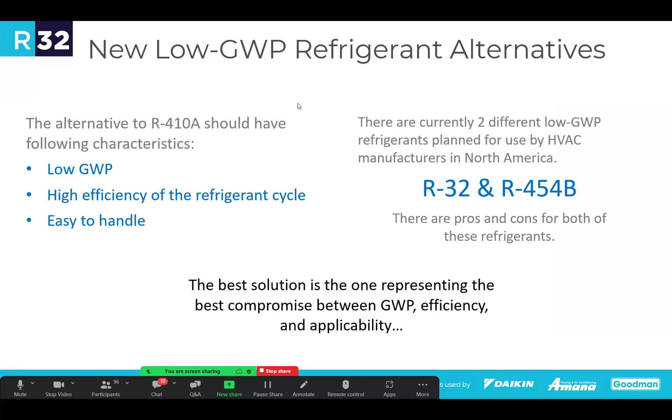So when we boiled it all down, we came down to R32 and R454B as really the two choices, and both have their own pros and cons that we take a look at. And my goal for today is kind of to walk through those pros and cons and to try to lay out the facts for you.

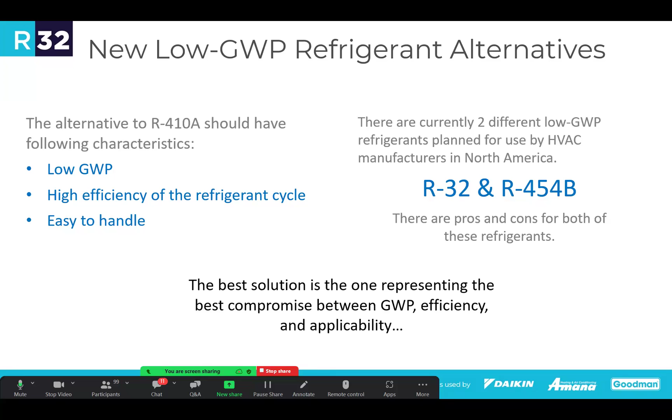And really, when we look at Daikin, Daikin has decided early on that we believe R32 is the best way to go. And I'll share some of our thinking behind that, but I'll leave it up to you at the end of this to decide where you think is the best option as you're going out and serving your customers and you're trying to make sure that you do the best to take care of everybody that you're working for. So that's where we're going with this whole entire presentation as we move forward.

So why R32? It's the first resource that I'll give you. And when we get to the end of the presentation, you don't have to write anything down. I'll give you a couple of QR codes so that you can go and access all of this information. But we created a website back in 2019 called r32reasons.com.

And we came up with really, when we look at it, that R32 is proven. There's over 230 million units, so we'll talk about that a little bit today. It's very easy, so it's very easy to top off. We'll talk about that a little bit in the field and why that's going to be important for your technicians. It's very efficient. We'll talk about the efficiency and the benefits that you have in your equipment.

And then the fact that it's available, it's a commodity. And so with a commodity, you're going to be able to take all of those pressures that you have out there and enjoy some really good cost savings potentially because it is a commodity and it's not a proprietary blend. So with all of that being said, let's go ahead and get in and start talking about this.

So the very first thing, let's look at Canadian regulations. So Canada ratified the Kigali Amendment, and that actually happened after the Paris Accords. So you had the Paris Accords that happened, much like the Montreal Protocol. And to sum up, all of the countries that signed on to the Paris Accords agreed that we don't want to raise the temperature of the planet more than 2 degrees Celsius. And so all of these countries said, we commit to not raising the temperature of the planet by more than 2 degrees Celsius.

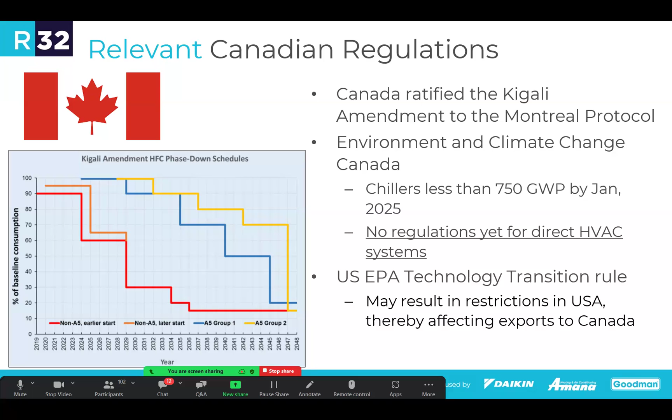However, some other countries have done that in other parts of the world and are looking at other different types of ways that they can utilize refrigerants. But we'll talk about that in the efficiencies when we get to that too. So what's happening in North America? North American HVAC manufacturers are planning to use either R454B or R32 refrigerants. As I said before, good news is R32 is already a staple in many other countries.

And like I said, there's over 230 million systems that have been installed worldwide, and that's in over 130 different countries. The interesting fact I like to share in terms of safety is, to my knowledge, there's not a single instance of property damage or injuries due to R32 being installed in a home and due to the fact that it's an A2L. So we do know that it is a safe refrigerant.

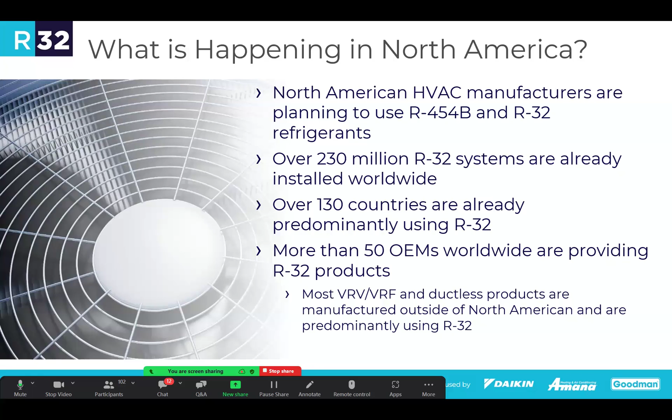And there's over 50 different equipment manufacturers worldwide that are providing R32 products. Most VRV and VRF and ductless products manufactured outside of North America are predominantly using R32. And so this just gives you a little bit of background when we're looking at the different refrigerants and what's available. So this is what's happening globally. You take a look at all of the rest of the world, the only area is North America that is considering R32 and R454B.

And so when you just look at the simple worldwide economics of scale, we know that there's a lot more R32 that is available. And R454B, one of its components being 1234yf, is a proprietary component. And so when you have a proprietary chemical, that can change availability, because you have limited production, and you also have challenges that will come into play as far as pricing and cost when you have that limited availability. And so that was one of the concerns that we looked at.

The good news is R32 has been used for a long, long time. So it started out in Japan in 2012. In fact, Daikin was the first manufacturer to utilize R32. Daikin did not create R32, but we were the first to utilize R32 for air conditioning. And we actually developed technology that optimized some of the characteristics of R32.

What we did when we started to look at where we're going to go with a low GWP refrigerant, is we actually released all of the patents that helped to take advantage of optimizing that and made that available for the whole entire world. And so we released our patents out and said, we really do believe this is the right way to go. And made sure that that technology was available to everybody else to be able to enjoy all of the benefits that R32 has for us.

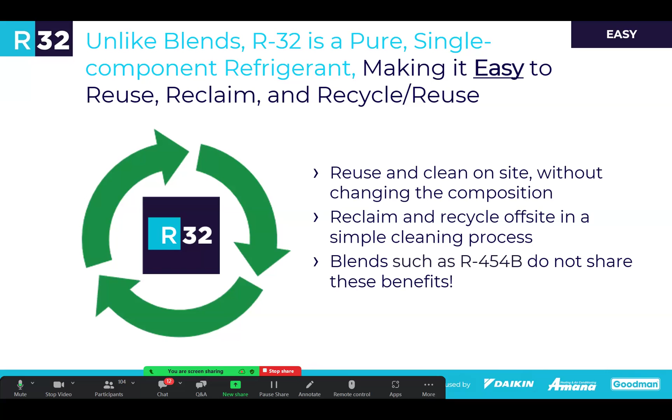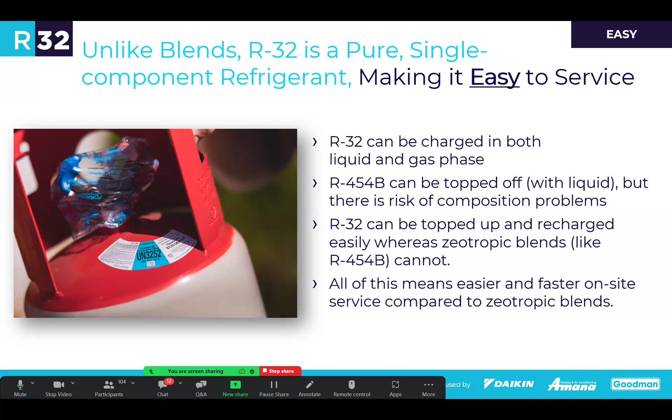And so it does make it a lot simpler, a lot easier to work with a single component refrigerant that, again, goes back to helping with the training of the people that you're working with and making sure that everybody is comfortable using the refrigerant as we move forward. Unlike blends, R32 is a single component. Also, this is going to make it easy to service because, again, we're not going to worry about it changing what it is because it's leaking at different rates. And so that's the first kind of thing that we look at.

When we look at the breakdown, it's also interesting to note 70% of R454B is R32. And so when you look at the breakdown of this, R32, 1234yf, 31% of it is that proprietary blend that is owned by Chemours and Honeywell. And to my knowledge, we're just starting to see that product come out and make its way into the marketplace.

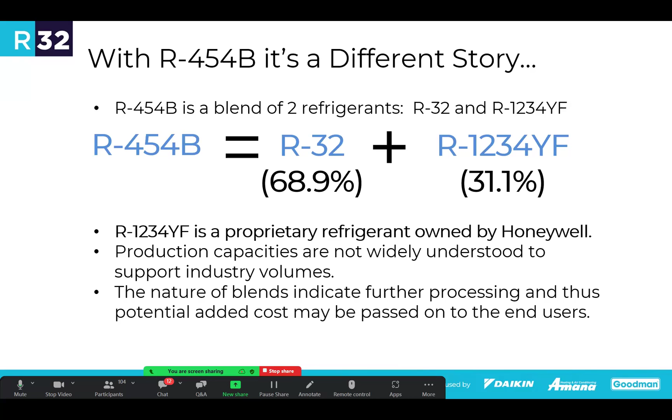But this year will be the first time that you'll start to see 454B systems out in the marketplace. And so it'll take a while to see how those systems are going to perform and what's going to happen as they get out into the real world and out of the laboratory testing situations that they've been doing for a while.

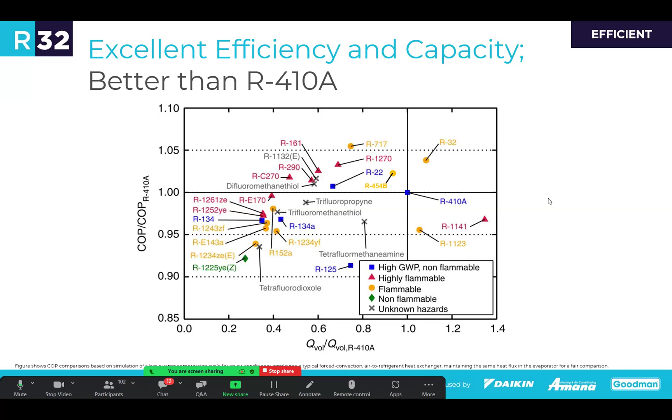By the way, here would be your R290, which is your propane. Again, not falling into this quadrant, which is going to give you all of the desired things that we were looking for. So we did an experiment, and I will never recommend that you take a 410A system and you put a different refrigerant in it. Same thing if you have a 454B system, that needs to remain 454B. If you have an R32 system, that needs to remain R32. You don't change refrigerants.

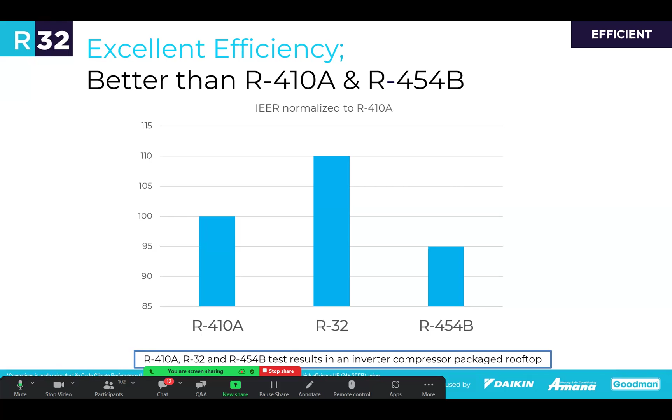But in a laboratory test environment, we were able to take a 410A system. We took all of the 410A refrigerant out, and then we added R32, and we did our testing. And then we took the R32 out, we added 454B, we did our testing, and here were the results of the testing. If 410A was 100% efficient, what we ended up finding out is we gained 10% in efficiency by adding R32, and we actually lost 5% in efficiency with 454B. And so you can see, again, in our laboratory testing environment, we saw that R32 really was a good place for us to be and for us to go.

So we don't believe, though, that this idea of GWP is going to be the final solution that they're going to land on. And so one of the things that we at Daikin really do believe in is this idea of life cycle climate performance. And what that takes into account is the direct effect from the refrigerant. So if there is a leak in the system, what sort of impact on the environment is that going to have? But there's also this indirect effect from the generation of the product and from the energy that system uses over the course of its lifetime.

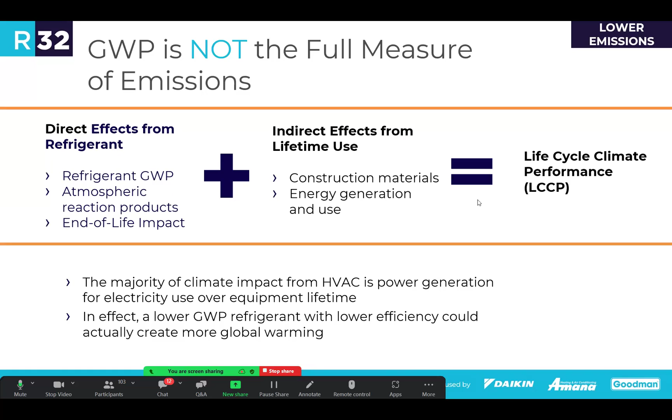And that gives you this number, this life cycle climate performance, that we really do believe every system should be measured by if the end goal is truly to reduce greenhouse gases and to be able to reduce the amount of impact that we have on the environment while maintaining a good, comfortable situation for all of the people. So when we take, again, a look at the different refrigerants, some people will go back and mention the fact, well, R454B has a lower GWP than R32. So wouldn't that be the more environmental choice for us to use? Well, we've got to take a look at everything again.

So again, if you look at the dark blue, that is our energy consumption. And so over the course of a system's lifetime, the R410A system is going to use a lot more energy. And this is, again, based off of a like-for-like unit. An R32 system will use less energy than 410A or 454B. So it already puts us down lower. The gray is the impact from refrigerant leaks. And so we can see 410A is very high. R32 is slightly bigger than 454B because R32 does have a higher GWP. Then we take a look at the refrigerant loss at the end of life, and then we look at the equipment manufacturing.

What you actually end up seeing is if we use life cycle climate performance as our measure, R32 actually comes in lower than 454B when we take into account the whole entire life cycle of the system that's being installed in the consumer's home. And so this was another big consideration for us to look at.

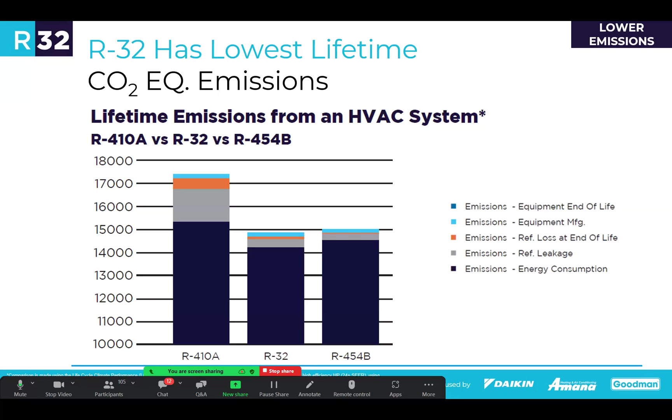How can we, by using less refrigerant, so we use 70% of the charge that you would need with 454B, and being able to have a more efficient heat transfer, how is that going to equate into less materials? And again, making a system that's going to have less of an impact on the environment that we're in.

The other big thing is because R32 is pure single component, this is going to have a big impact on cost. R32 is less expensive to manufacture than blends, just by the nature of it being a single component. It's less expensive to install and maintain.

And then also R32 is a commodity. So every refrigerant manufacturer can make R32, and it doesn't have a proprietary component that could be held up if one of those entities that is able to produce the product were to have some challenges with supply chain.

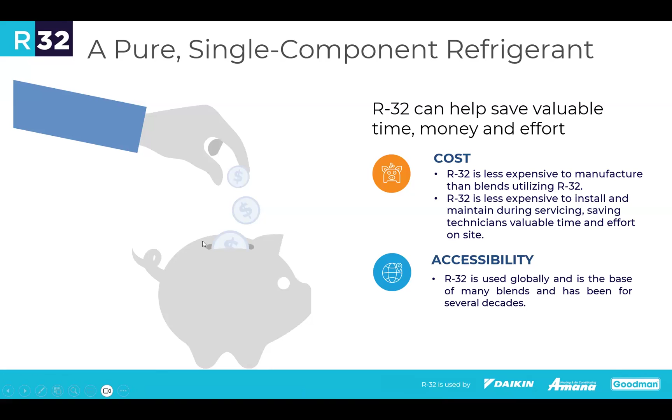So we'll get into another real quick video here, as far as who owns the patent of R32.

Hold on 1 second. All right. I don't think we're sharing at the right place. Well, while we're doing that, do you have time to take a question? I do have time for a question.

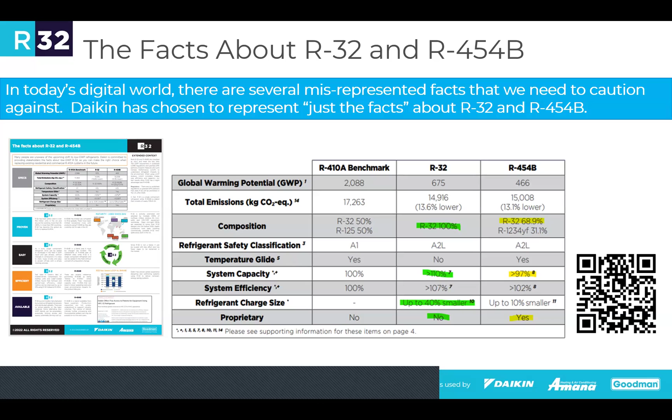So again, it's not proprietary. It's something that's available. It's a commodity. And so this is a great sheet, a great resource for you to be able to have and to use. And then the other big place that I want to make sure everybody goes to is the HVAC Learning Campus that we have available. This should take you right into our site, and we have a resource page that is available. And I'll go ahead and take us to that resource page real quickly and let you guys see what we have available there.

And so I'm just going to change my screen share here real quick. Just a quick note, Ben. Yeah. I think some people are having problems with the QR code. That doesn't seem to be going to the desired landing. Even the one that we have right now? I think the previous one is what they were saying. All right, well, let me show you a different way to get there then, I guess. And I'll get you guys there in just a second. So let me do this real quick. And I'm going to run over here to... Second code seems to be doing A-okay.

All right. So that's going to bring you to the HVAC Learning Campus. You're going to come in as a dealer. When you come in here, tools, and then you're going to go to resources. Under resources, we have R32. This is where I was talking about. So we've got training resources for you. We've got the R32